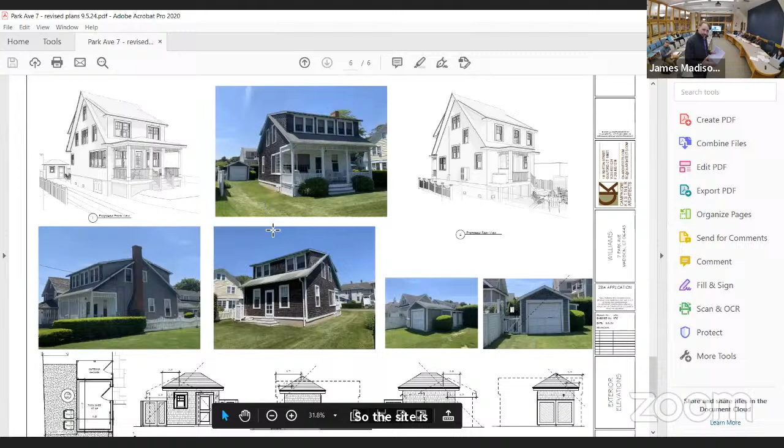So the site is very small, about 4,400 square feet, and it's tucked in with similar homes on the north and south side. It has a FEMA line that comes through the middle of the site diagonally and touches the front corner of the building, putting it into a LIMWA zone.

A limited wave action zone basically has VE zone requirements on the home. So in order to do anything to this, the 50% rule associated with investing in it would really trigger a full upgrade, meaning it needs to go up on piers and have breakaway walls and such.

The existing cottage, although they had done a pretty significant renovation on the second floor, they had not really done any improvements to the structure of the first floor foundations when they did it. So they're really evaluating what would need to happen to bring this into conformity in its location.

It really wasn't a feasible option, so we did take the route of taking it down and rebuilding it. In doing so, we can bring it into full structural compliance, full FEMA compliance. We're planning to move it back on the lot so it's in the still water flooding zone and not in the wave action zone, so we don't have to go as high and actually take it out of harm's way. The elevation I'm showing, proposed versus existing, is very similar.

They love the home, they love the views, they love the positioning. So we took a lot of clues from that, but it is a little taller given how we have to raise it up compared to what it was before.

So if we can go back up to the site plan, I'll walk this through and then we'll come back to the accessory structure. So the first variance is associated with the front setback. This dotted line here is showing the existing footprint of the front porch, and we're planning to move the house back 5.25 feet compared to what's there now.

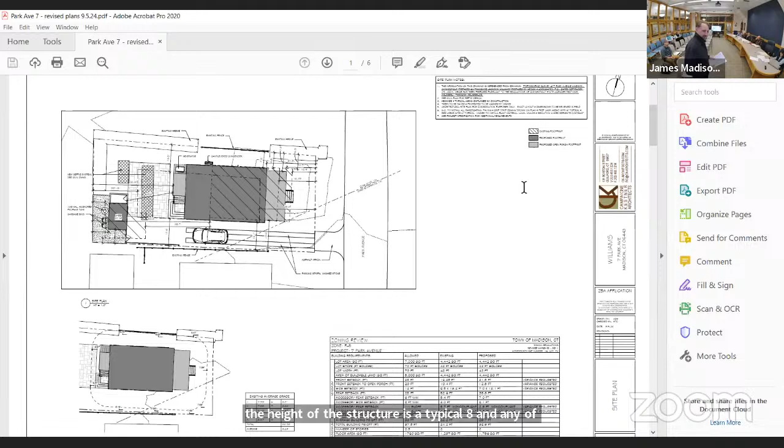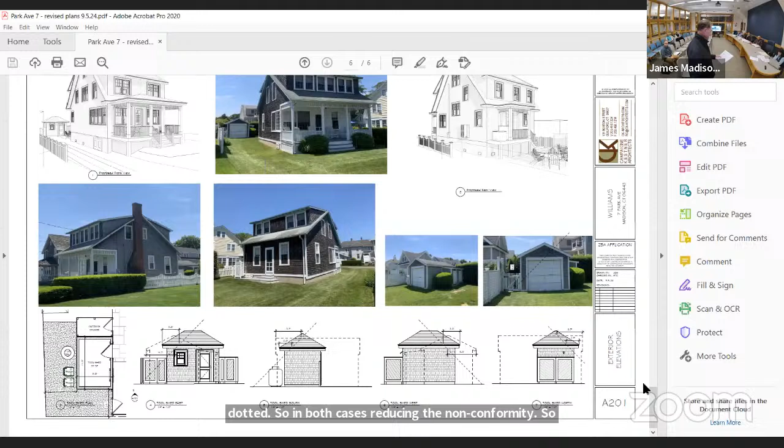If we go to the last page of my presentation, you can see the diagonal lines coming off of the two sides, and you can see the existing structure dotted in. In both cases, we're reducing the nonconformity. On the rear side, we're reducing it by 2.8 feet compared to the existing garage, and on the south property line, we're reducing it by 2.7 feet. In both cases we're making the footprint smaller, the shed smaller, and reducing its nonconformity by pulling it back from the side property line, while maintaining a similar height, which keeps it a viable shed. If you go much lower with the eave, it's not really going to give you much storage.

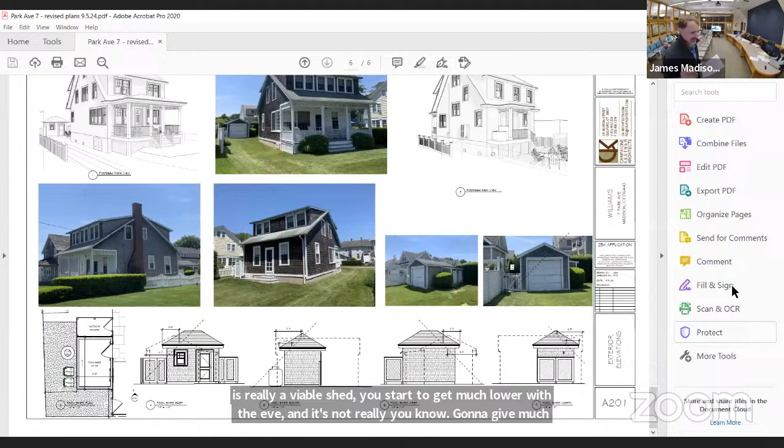So we go back up to the second page. Just for orientation purposes - second page, third page - this is the existing site plan.

The layout of the home is very simple. There's a front porch that's open on the front, not planned to be screened. You come in to an open plan living room, kitchen, bath, and mudroom entry with a stair going up. Very minimalist in its layout. There's really not much place that we can squeeze. A very small back porch comes down to a patio that sits over the septic system and the shed in the back. We're hiding the trash cans and a propane tank in the back.

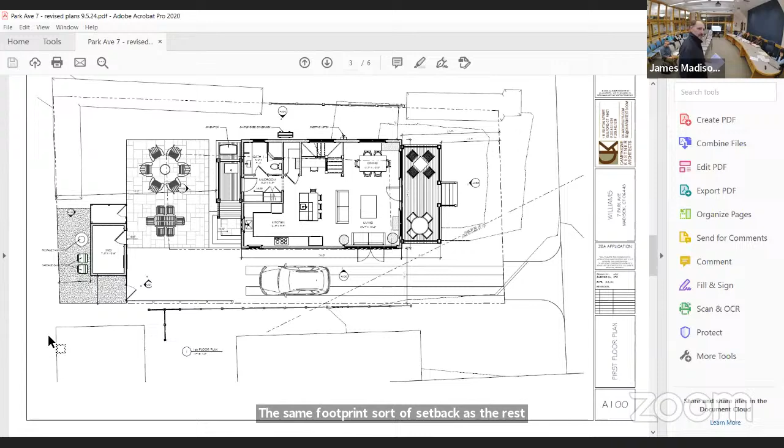Utilities will be hung off the side, and the generator is in the same footprint, sort of setback as the rest - that's under the same setback variance for the north side. Then on the upper stories, you come up to 2 bedrooms and a private bath, with a stair in the middle and a den. Then you come up to the third floor, and there's a sort of livable attic space that's open, with an overlook down the staircase. Very low headroom condition up here, but it does add a little bit of usable space.

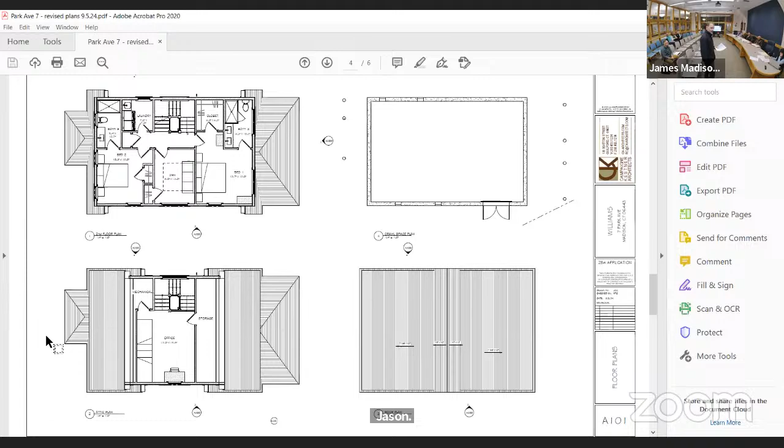We're compliant with regard to height and average roof with what we're proposing, and I think it's in keeping with the adjacent neighborhood. I think it'll fit in well, still cottage in its feel, still has a lot of the characteristics of the original cottage. Happy to answer any questions you may have regarding our approach to this.

Do you guys want to review the site plan, or do you want to ask questions and then move on to the site plan after? Coastal site plan, for you guys. I thought that was the site. Well, the coastal site plan is separate, that's going to be my presenting. I was going to ask for the actual zoning board application form - could you put that up? Sure, sure. I think you've covered most of the stuff that's in it. Yep, no problem.

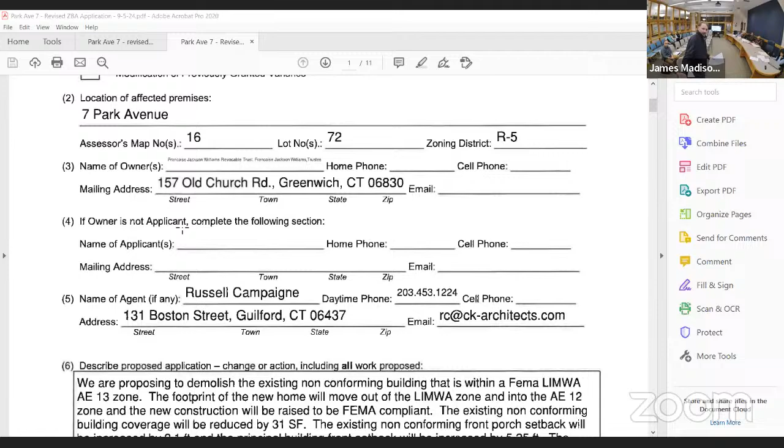So this is the zoning information as far as the lot and location, the ownership. Reading through this, we're planning to demolish the existing nonconforming structure that sits in a LIMWA AE 13 zone and move it back on the property so we consider it a still water flooding zone to be FEMA compliant. We're reducing the nonconforming building coverage by 31 square feet.

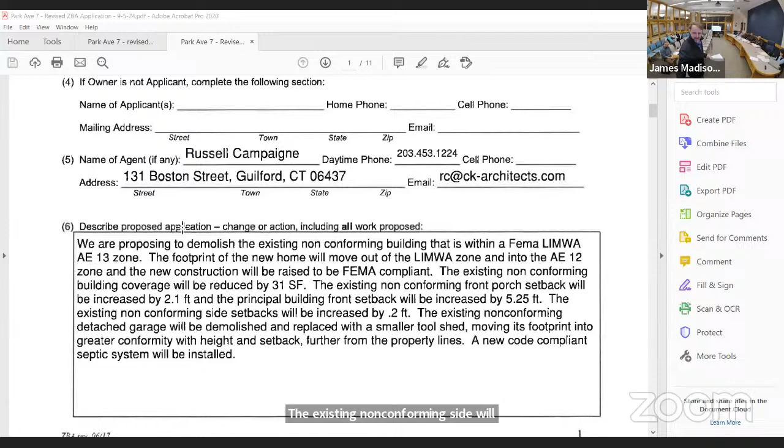We're reducing the existing nonconforming front porch setback - we're increasing the setback by 2.1 feet. The principal building front setback will be increased by 5.25 feet. The existing nonconforming side setback will be increased by 0.2, and the existing nonconforming detached garage will be demolished and replaced with a smaller tool shed, moving its footprint into greater conformity with the height and setback.

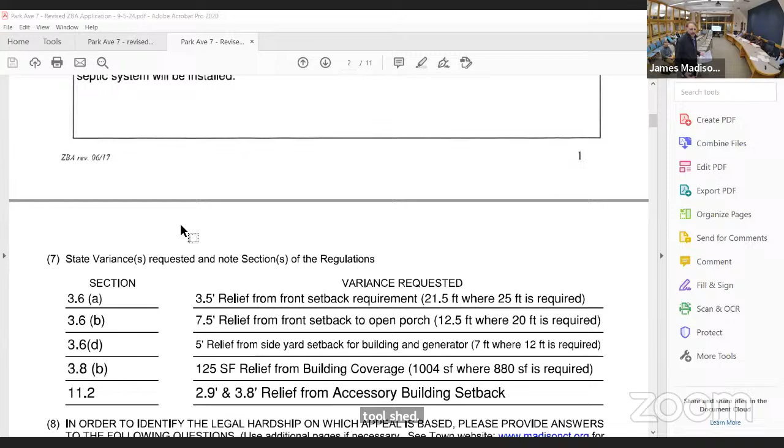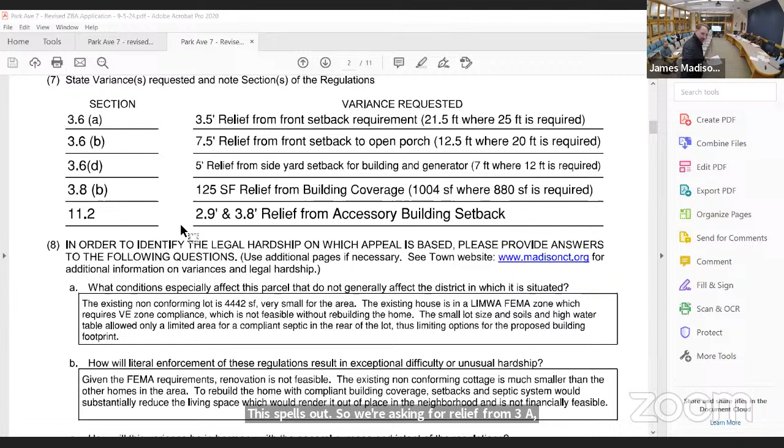This spells out that we're asking for relief from 3.6A, B, D, 3.8B, and 11.2, which lays out the various setbacks, the coverage, and then the relief from the accessory building setback.

I think the site is existing non-conforming, so there's a hardship associated with it being an existing non-conformity. The shed, garage, and house were all built prior to zoning. It's a very small lot at 4,442 square feet, and it's in a FEMA zone and a LIMWA zone, which is forcing a major redo of the property to bring it into compliance. We also have septic being brought into conformity. It's near the shore, which is definitely a benefit per the plan of conservation development and town plan.

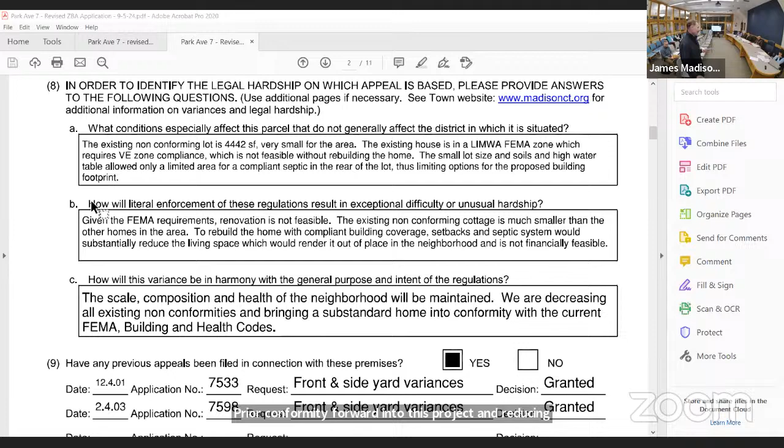Literal enforcement of the regulations would really render the site unusable as a home. With the lot coverage and floor area ratio requirements, it'd be really unusable. So bringing that prior nonconformity forward into this project, and reducing it slightly, is the only feasible avenue to have continued use of this property.

And how is our proposal in harmony with the general purpose of the regulations? I think we've taken care to look at the existing home, how it fits in context with the adjacent homes, and design something that will feel appropriate and in keeping with the neighborhood, yet still viable, safe, and better for the environment with the septic.

We did have two variances that were granted previously that, if they were written correctly, probably would have meant we wouldn't need to be before you. But when they were granted, they mixed up the north and south property lines in how it was written. They granted 7-foot relief from the north, but it should have been on the south, or vice versa. So we decided when we met that it wasn't something we really wanted to argue or bring forward.

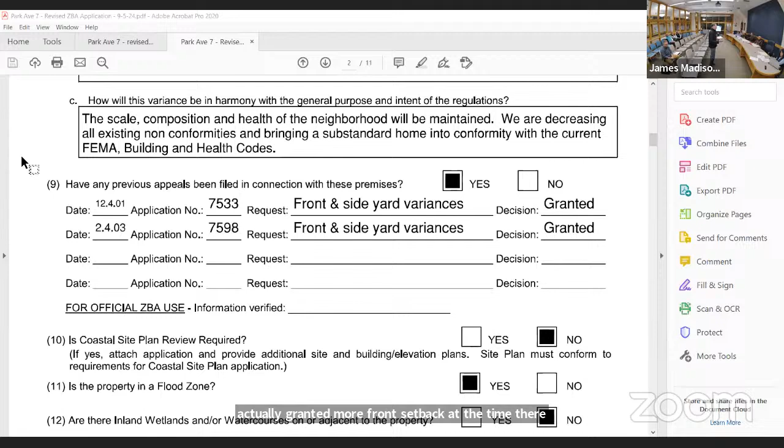So we decided to just start over and get new variances for the property. This had been granted when they did the dormer change on the second floor, and they were actually granted more front setback at the time. There wasn't an open porch setback, so that wasn't granted, but the north and south property line setbacks were granted at that time, both sort of in keeping. They just reversed them when it was written and put on the deed.

So in the process of this, you're saying, okay, we'd like to cancel those and replace them. Yes. I don't know if they're ever actually canceled, they're always there. But first, they were under the old zoning, so the requirements were very different. Basically it was 1 acre zoning when they were granted back then.

The way it was handled is very confusing, because there were two that were supposedly the same, a corrected one or something, but it wasn't actually corrected. It was very strange. They went before the board, got it issued, put it on the deed, but it was granting relief from the south property line when they needed it on the north. Then they came back and did it again for the same variances two years later, and it was reversed again. I don't know what the full history is, it's a long time back, in '03, so we don't really have a record of that.

So I think we should just move forward with our presentation and hopefully seek a new, well-written variance that addresses all the issues. I was just thinking of clarifying it, if we just said, forget those. Yes, I think that would be our interest.

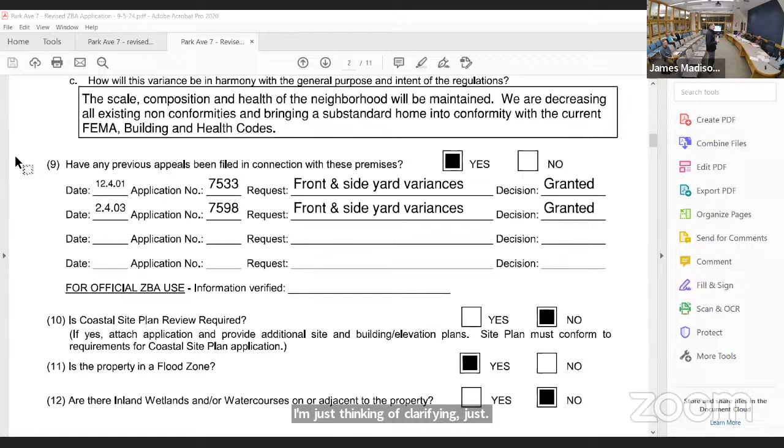So it is in a flood zone. We do have a coastal site plan. I don't know what happened here, but that should be yes. Yes. And there are no wetlands within 100 feet of the property. This is an issue with your application. So we're not within 500 feet, and we're not in the watershed boundary.

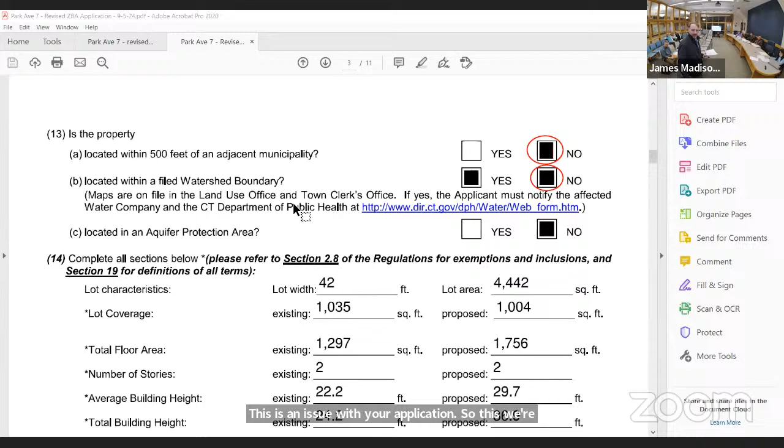And these are the lot characteristics you can see. So what are the red circles? These are the ones that should be marked. This one, for some reason, both pop up black when they try to fill the application online. Yeah, the fillable form makes an error, so they're indicating with the red circles what the actual answer is.

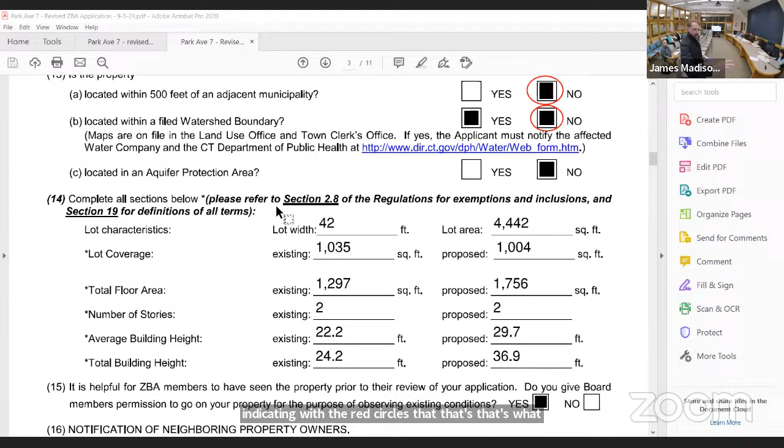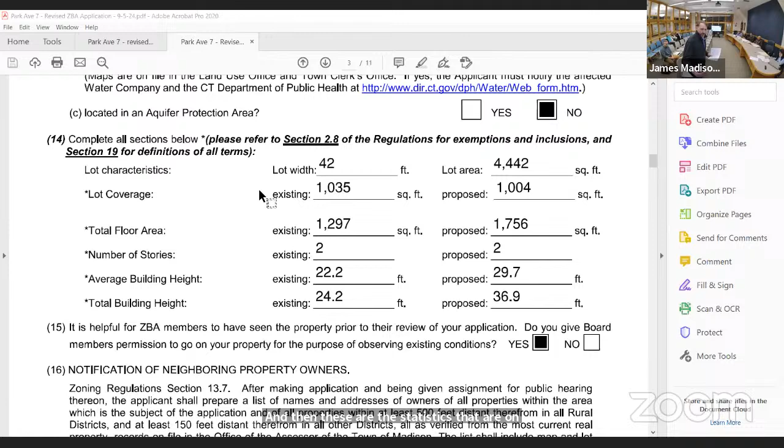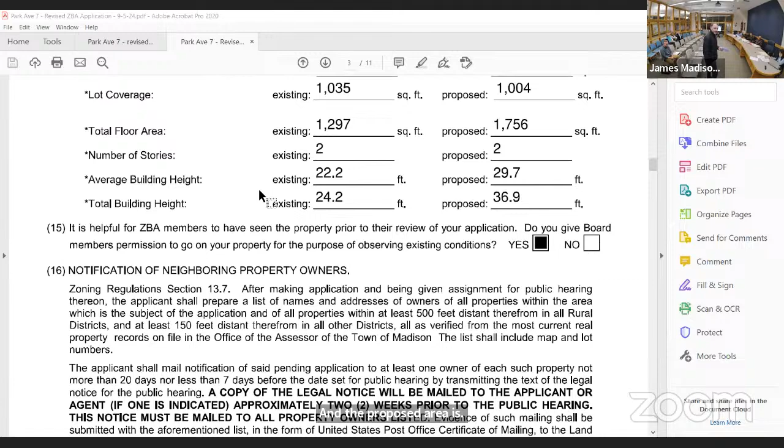Okay, and we're not in an aquifer protection area. These are the statistics on our chart as well. We're compliant with regard to building height and average building height, and the proposed area is bringing forward the existing nonconformity for the total floor area. That's it, the rest of this is just all boilerplate.

Would you mind going back to the page with the LiMWA zone line? That's on the site plan, the first page. So you were saying this house was built prior to zoning, so since the house was put there, then this line was put on the property. So, yes.

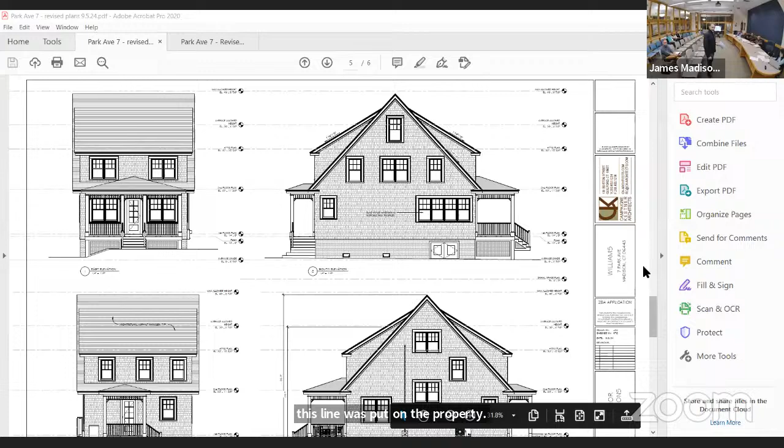This is the FEMA line that distinguishes the A13 LiMWA zone with wave action, and north of that diagonal line is an A12. This corner of the porch is over that line and brings the whole building into the requirements of the LiMWA. I see, so if you were to just rebuild it in place, you'd be in there.

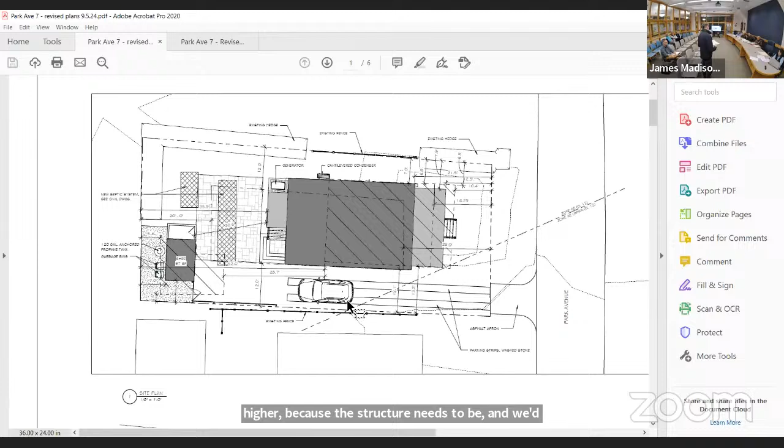We'd have to be 3 to 4 feet higher because the lowest structure needs to be, and we'd have to be on a pier foundation system as opposed to a regular foundation system, which is much more costly.

So we are just sliding the house back in the same line, just enough to get us out of that. So that 2.1 feet that we're pushing back is basically enough to put us into the A, and that allows the house to be 3 feet lower.

Thank you. How much of it? About 3 feet, because it's the structural depth and an extra foot, A13 to A12, plus the 2 feet of structural depth, so it's upwards of 3 feet. That makes sense.

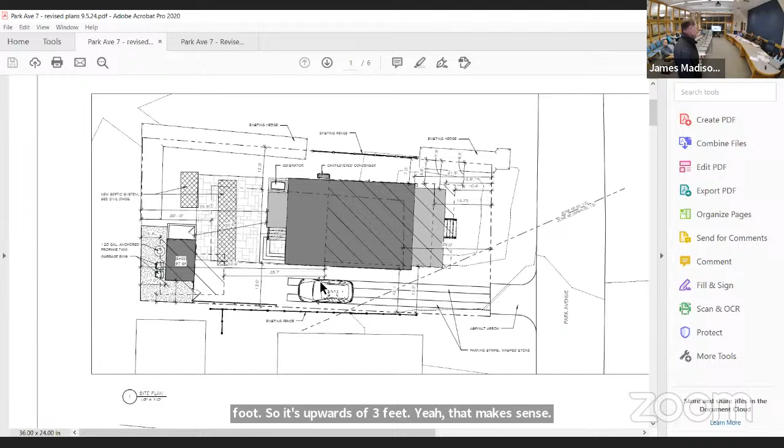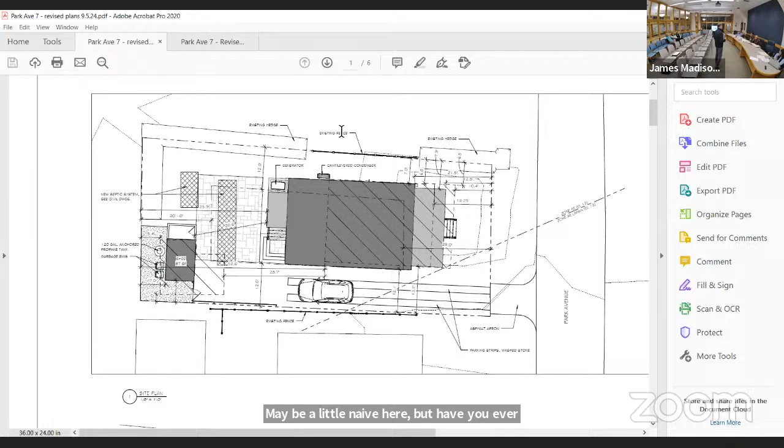Maybe a little naive here, but did you ever consider just raising the house as it is up? Then you would avoid all of these variances because you could rebuild in the same footprint and carry your variances forward.

We would still be in the LiMWA zone if we did that, so we would have to raise it that extra 3 feet. We would have to add the stairs.

Does Madison have a by-right FEMA compliance? No. So many other towns do have the ability to raise a house, but I would have to come for a variance for you to raise the house to be FEMA compliant. Guilford has a staff approval system for FEMA if it stays under the height, but Madison does not, so I still would be before you to raise the house to make it FEMA compliant.

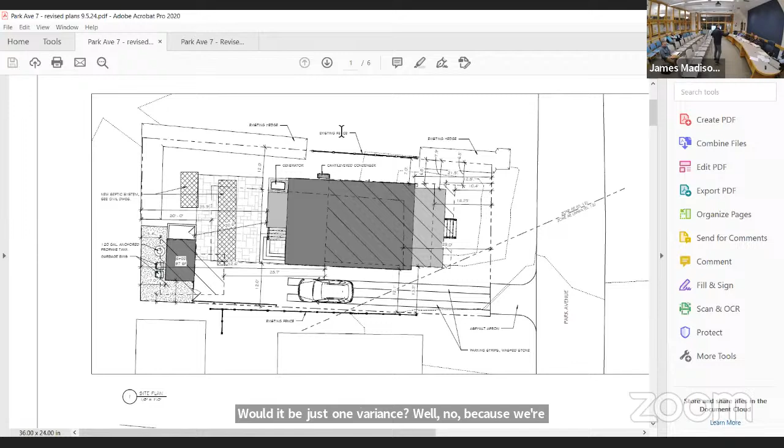Would it be just one variance? Well, no, because we're non-conforming and we're making the building higher within those non-conformities. So it really would be very similar, because I'd be increasing the non-conformity within a non-conforming setback. Yeah, because if there's a setback requirement and you raise the building, then you need to get a variance for this again. Isn't that correct, Maria?

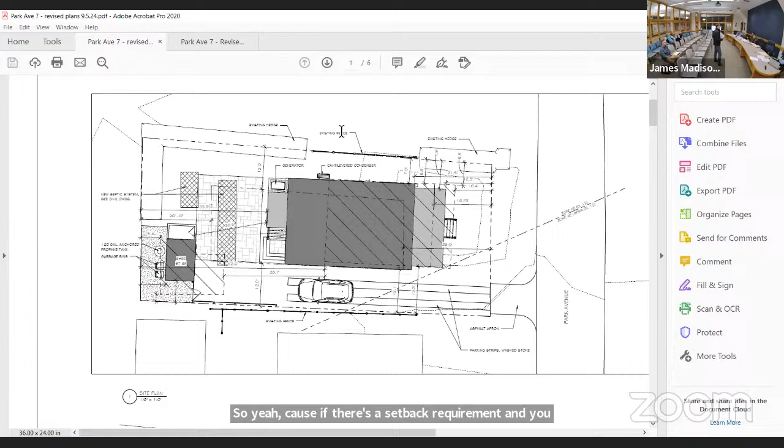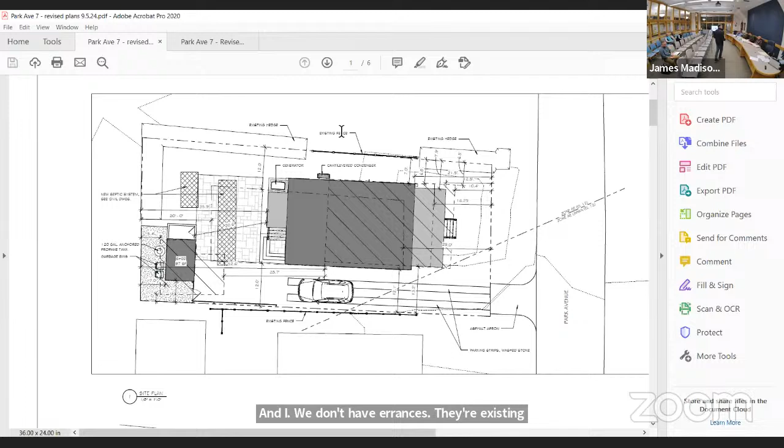So it would be these variances plus raising it. But even if he stayed in the same footprint, all of those other variances could stay with the house, they're technically increasing because they're increasing vertically, and we don't have variances, they're existing non-conformities. Arguably, there were variances granted, but they weren't written correctly.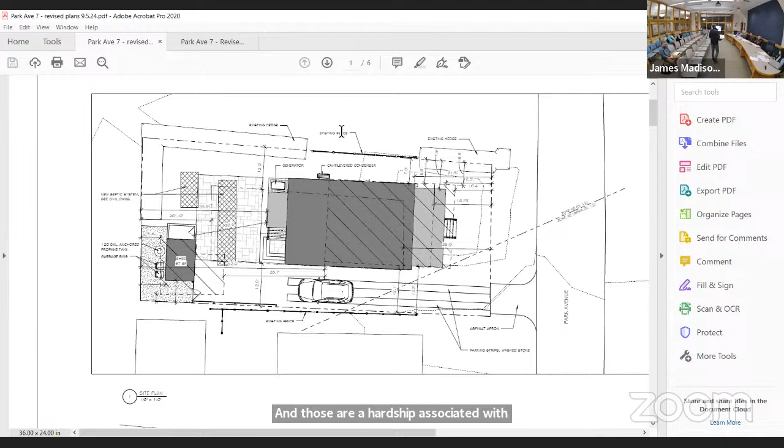So we really are just basing this on the home was built prior to zoning. Zoning then was imposed upon it to make nonconformities, and those are a hardship associated with that continued use of a property. So this, I think, is the path of least resistance for them, and definitely better from bringing it more out of harm's way by moving it back on the property.

And really lifting homes, if you raise the home, you're exposing it to more wind, you have to bring the structural upgrade to the whole house. For a cottage that was built like this that just has sort of 4x4s every 4 feet, it's a really hard process to try and strengthen that home and bring it up. We have to meet energy code if we do that, so we have to bring an old cottage up to energy code.

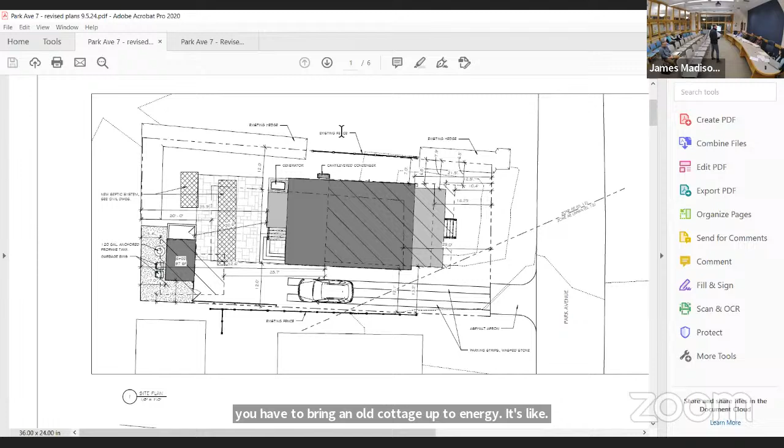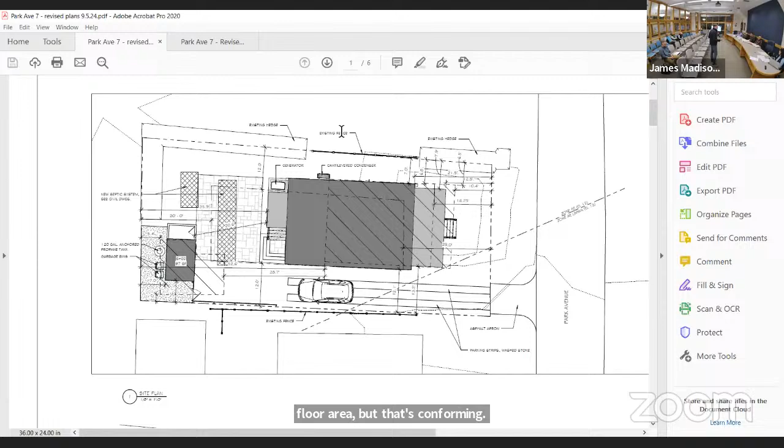It's a cascade, and it's why you see so many homes, unfortunately, not being renovated. You see a couple that do, but then you watch what happens to the house after it's lifted - it's basically a whole new house, they're just done from the inside. So this, I think, grants - we are going a little higher to capture a little bit more floor area, but that's conforming, just to justify the investment and make it a little bit more usable, but it's only 1,756 square feet of living space. It's very, very small.

Yeah, my only concern was the number. I mean, you have 1, 2, 3, 4, 5, 6 variances here. And our charter here is to say, all right, if you've got 6 variances here, what have you given up to justify those variances? Well, we've made every single one more conforming. Yeah, but is it enough? The bottom line is still you've got 6 variances. If you only had 1 or 2, but here you've got 6. And you've actually increased on a couple of them, made it more non-compliant.

No, everyone is a reduction in non-conforming. No, if you go to the accessory building, the existing is 5.7 and your proposed is 2.9. So that's an increase. And the accessory side setback, the existing is 6.5. No, it's backwards the way it's written, so the existing rear extends 5.7 feet past the 1-to-1 slope. Our proposed is 2.9, so that's a 2.8 foot reduction in the non-conformity. So it's not, because the setback is set by the height of that angle, it's backwards. We don't have a setback, it's not like we have to meet a 10-foot setback. It's determined by the height.

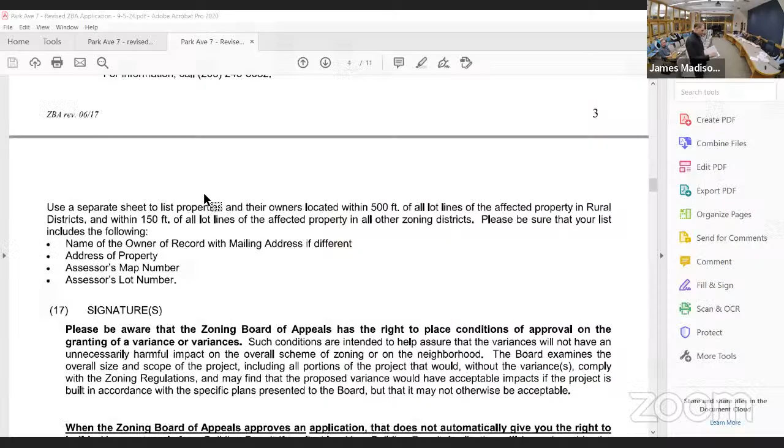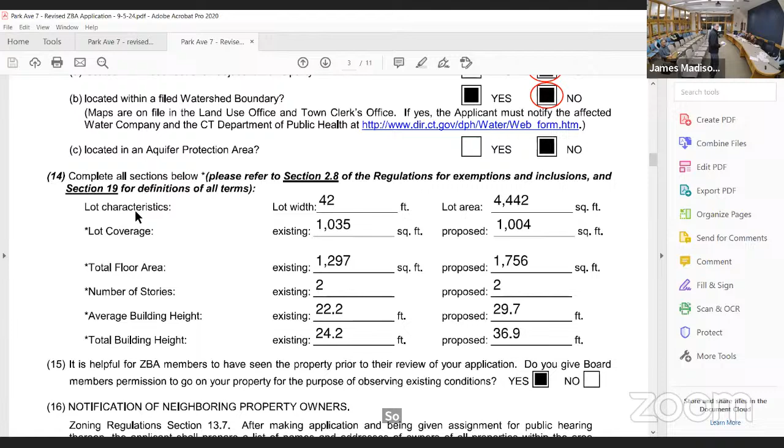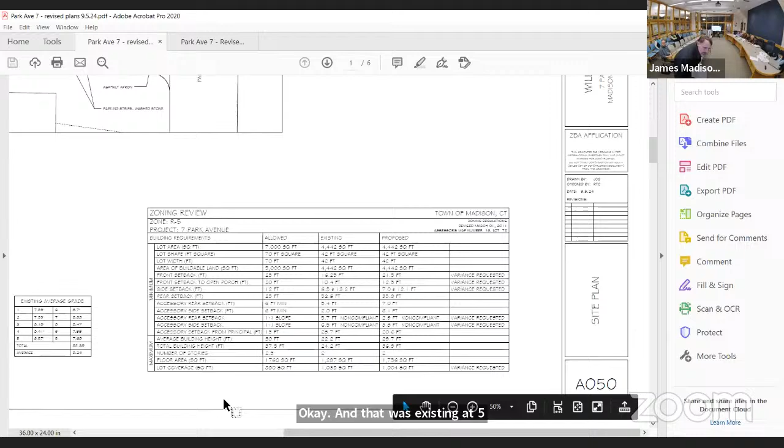Here, yes. Okay, so you were pointing to this, 29.7 versus 22. That is the height, and that's got to be below 30. So we're still conforming. Okay, so what else were you... are you on the zoning table? No, I wasn't concerned about that, I was looking at your table for the accessory rear setback. Okay, and that was existing at 5.7. And now you're at 2.9, so closer.

Can I point out something? I see where you're going. I find that sometimes the setback differences are a little confusing, because on the tables here, they state how much the non-compliance is, but on the other one, it states how far the setback is. Right, yeah, and it gets inverted, because in this one you want it to decrease, but in the other one you want it to increase. Right, the setback from the front, you want to increase the setback to be further away. But on this one, it's written as how much of a non-compliance do we have? We're reducing non-compliance.

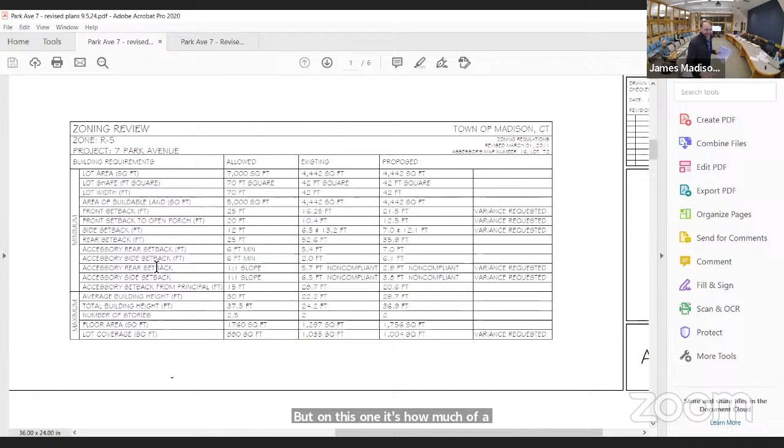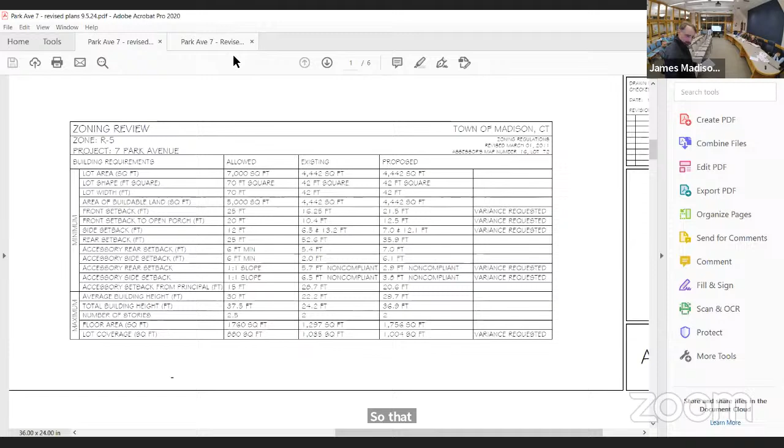So if you just look at our chart, the current setback is 5.4, our proposed is 7 feet, so... no, actually, that doesn't add up right either. So it's reversed. We're non-conforming by 5.7, and we're going to be non-conforming by 2.9 when we're done, when we move the building further away. Right, so we're ending up being 2.8 feet closer to conformity.

But it's not the same, because the eave height is slightly different, and that's what's setting our measurements. So it's that particular diagonal line that's very confusing, but in all cases, we're reducing the non-conformity. Okay, all right, I'll believe you.

I would say that really why so many variances are required on this particular lot is that it's 4,400 square feet. I mean, it is the size of a lot of houses, it's the size of the property. And that's been a continued use, and it's similar to some other, but it is smaller than most of the other area project properties. But I do think that that is a particular hardship to maintain a useful site that you can build on. And so there aren't too many other ways that I think we could bring it further into conformity.

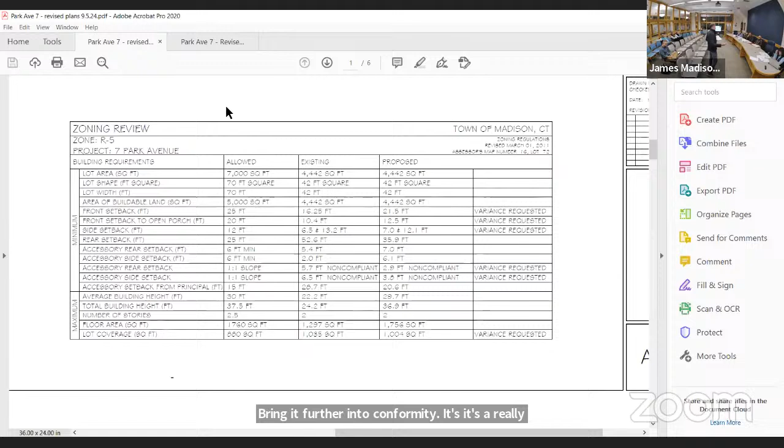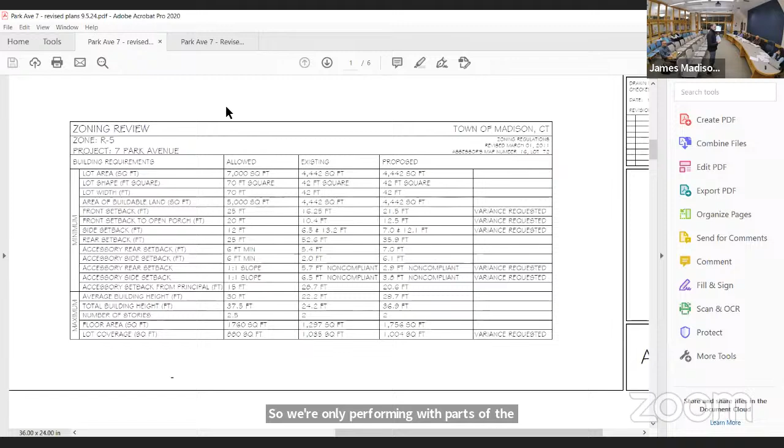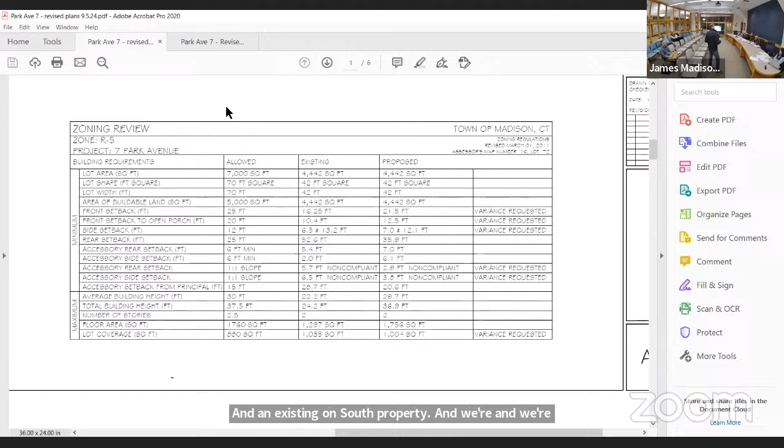It's really tricky, but the big things, the bulk of the house, we're conforming with regard to height and with floor area. So we're fully conforming with regard to the bulk of the house, which I think is important to say. And we're maintaining an existing condition on the north property and the south property, and we're benefiting the town and the neighborhood by moving it further back. And we're bringing in conformity with septic, which Mike will get into, which I think is a real benefit to the town as far as granting this and allowing the investment to improve this property will be a benefit.

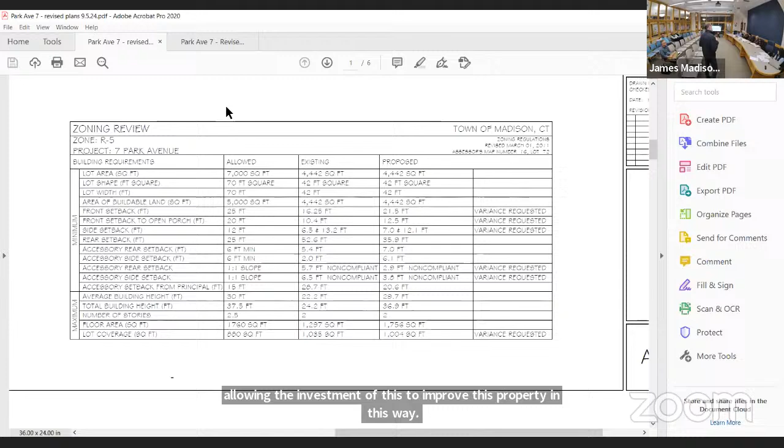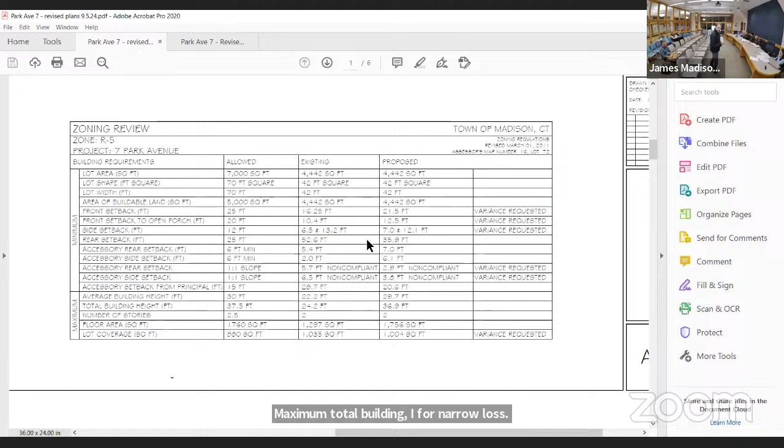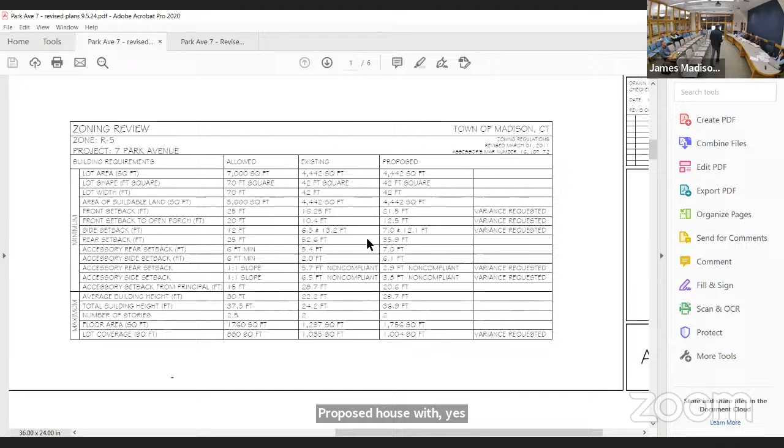I did have a question on the maximum total building height. In the regulations, there's a maximum total building height for narrow lots. This property width is 42 feet, if I'm correct, and the proposed house width is 24 feet. Is that correct for the new house? Yes, 24 feet. Okay, so that comes out to about 57%. And in this particular table, it says the maximum total building height would be 36 feet. What table is that? Is that the zoning laws? 2.7.1, zoning laws, it's in the regulations.

So that might be, so the narrow lot, you're saying percentage wise of the setback or the house width compared to the width of the lot. Yes, and it's triggered for narrow lots that are under the existing required lot width in the zone.

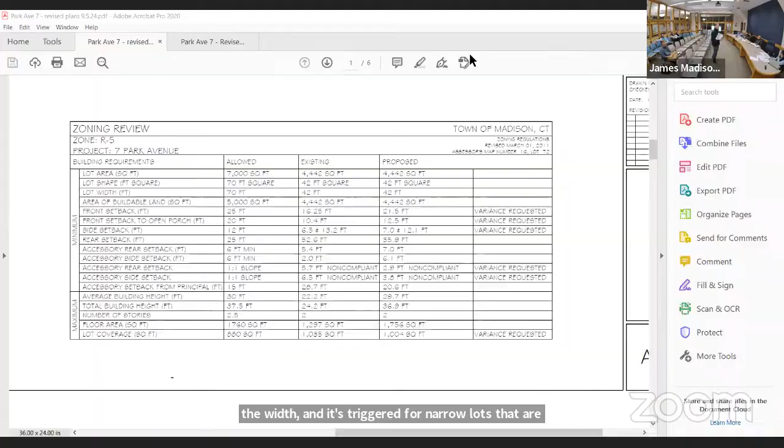I thought it had to be raised for FEMA. I don't know, well we are higher than what... yeah, I think there is an exemption for FEMA, but we are potentially higher than that. I think if we find that's applicable, we could modify our design in order to be compliant with that height. Might have been an oversight.

You pull up that section? Yeah, I guess so. Which, is that an exhibit submitted? Yeah, so that's the active current copy of the zoning? Mine's old. Height limitation 2.7.1. Maria's going to bring it up. That's good, John. Maria, can you display that? I'm getting there. Okay, super, thank you.

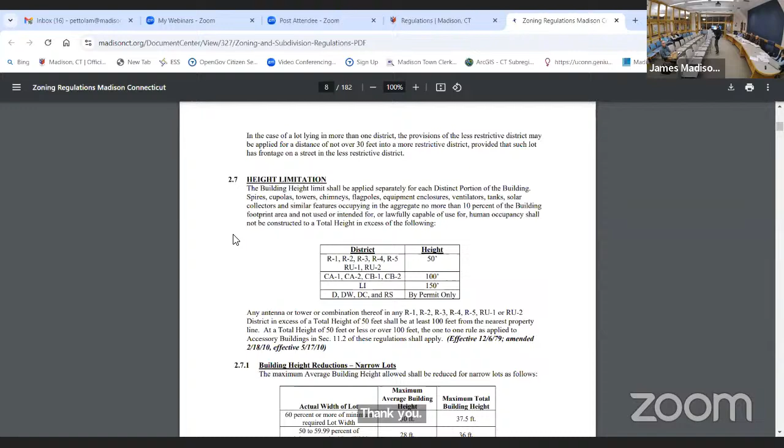So 42, the house, widest portion, so that... it could be, so we're in the, here it is. Yeah, it's over here. So 36 feet and average 28 feet. Okay.

What is, and there's no exemptions, there's not even a FEMA exemption. So I thought there was. For buildings in the floodplain, maximum average total building and average height, just from the original grade, it doesn't give an exemption. I was taking it as that they were exempt, but it doesn't give an exemption. Okay, shall be measured on that, well we likely have to look at that, actually.

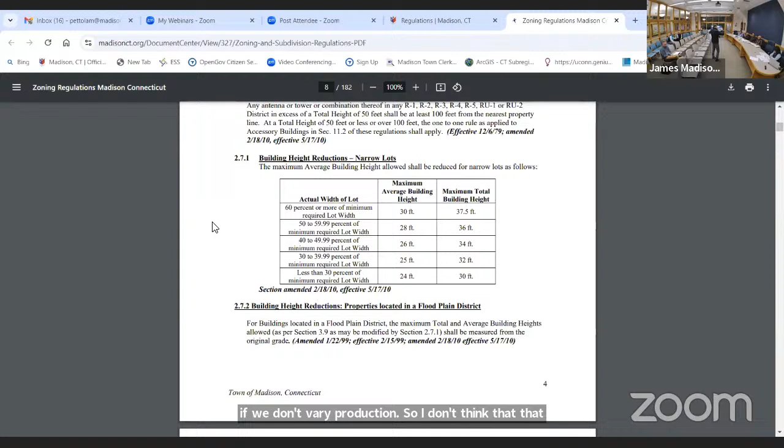So I don't know whether, I mean if that is required for us, I'd love to move forward with our variances that we have before you this evening. When it goes to building permit, we won't be able to build it if we don't have a variance for a height reduction, so I don't think that imposes any real concerns. It's basically just lowering the pitch of the roof. If we were to look at the way this is laid out, we would use the pitch of the dormers and the main roof in order to bring them to 36 feet, into conformity. So when we go to get a building permit, we would have a compliant situation.

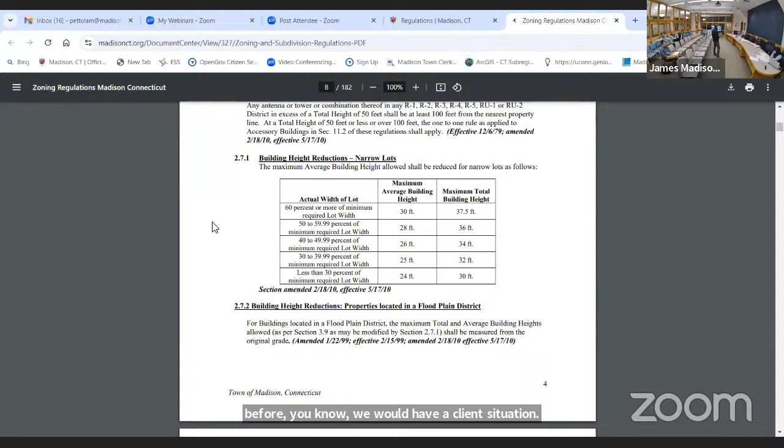Maria, does the fact that they'd be elevating it because of FEMA requirements provide justification for another variance? I would think that basically says that 36 feet doesn't allow it, that's why. I actually missed it too when we went over it, but like you said, the other variances we're asking for would come through for building. So I could reapply for another variance if it came before you, if we wanted to pursue that. But I think it can be a standalone situation because I can talk to the client about making a modification of the overall height of the project. We designed this way because we thought we could go to 37.5 feet.

Yeah, I'd hate to have to deal with it separately though, because then we could say, well no, you can't do it, because you violate something, you don't have a variance up to that height. And I don't want to, you understand what I'm saying?

I'll have to consult with them, but one of the challenges of arguing a variance on this piece is that I thought there was an exemption associated with FEMA to encourage people to bring things into conformity. There isn't, but if you took the existing house and raised it to be compliant with FEMA, the peak would be lower than we're proposing. So it's harder to push for a variance to make it higher. In this case, we'd be increasing non-conformity beyond the FEMA requirement. I don't know how we'd word an approval for the plan if we then had to say you can't make it that high.

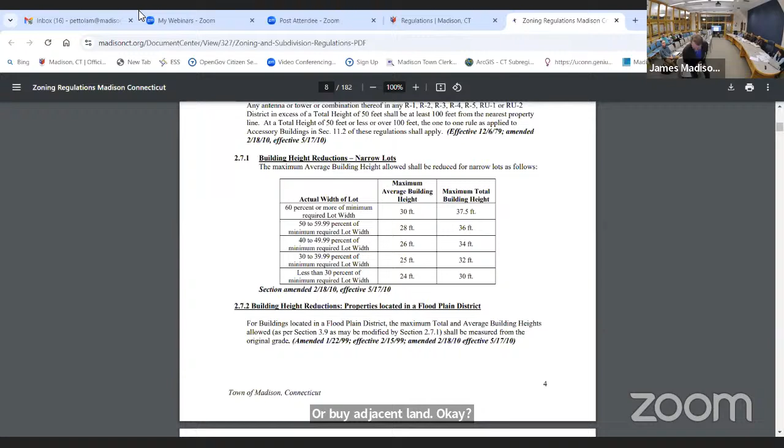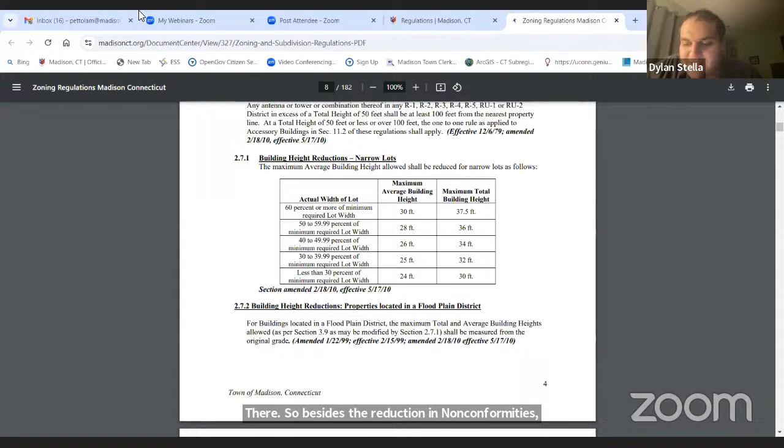I'm sorry to interrupt. Go ahead, Dylan. So besides the reduction in nonconformities, would you say the size of the lot constitutes a hardship? I would say the size of the lot is a hardship, the FEMA requirement is a hardship, the septic constraints of getting a code-compliant septic on the property is a hardship, and that it is an existing nonconformity that we are reducing in all cases. Okay, thank you.

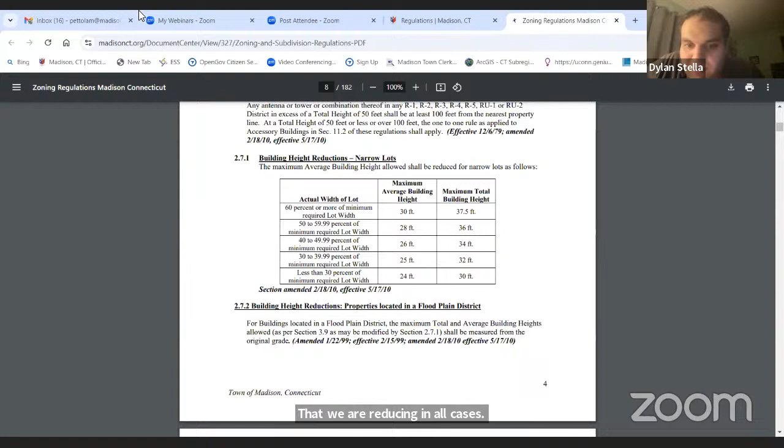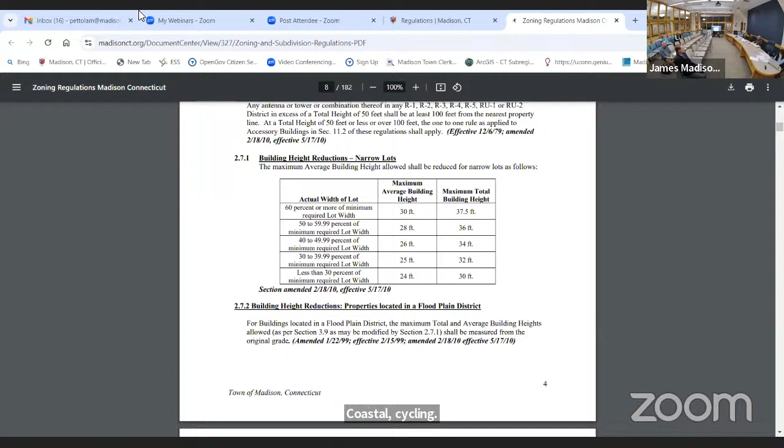Should we move on to the coastal site plan? I think it's okay. Would you mind reviewing the coastal site plan? Mike is here. Okay, great. Good evening, Mr. Chairman, members of the commission. For the record, my name is Michael Harkin. I'm a professional engineer and principal of Harkin Engineering, located at 78 Wolf Hollow Lane in the town of Killingworth, Connecticut. Again, here tonight on behalf of our client for the project at 7 Park Ave in your town of Madison, Connecticut.

So what you see here is our coastal area management site plan, or coastal site plan. If we start off with our location map, we all know where Park Ave is based on the map. You can see we have the survey, performed by Gesick and Associates. The site is located in an R5 zone, also known as map 16, lot 72. As Russ said, it's a little over 4,000 square feet, or 0.1 acres, so it's very, very small.

I had the easier job as compared to Russ's. Maria, if you can zoom in on the site plan.

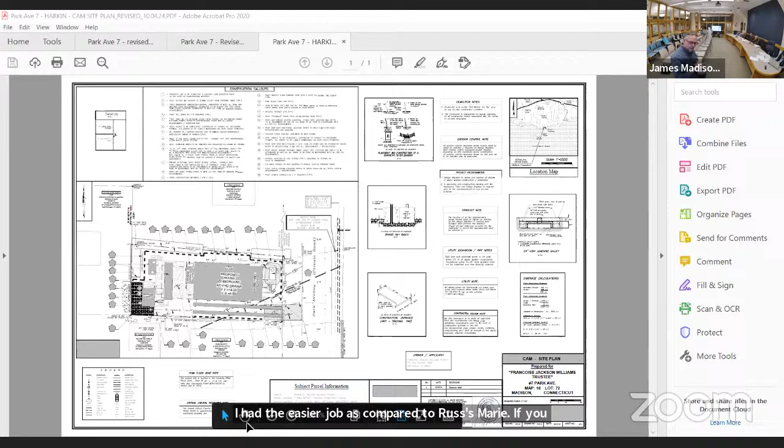As described by Russ, we're in an AE12 and AE13 zone. We have the big bold line here, which is the flood zone, and then the LiMWA down in this section. As per Russ's discussion, we've moved the house back. The proposed house is shaded pretty dark, the 2 bedrooms, and you can see it's right at the corner, right outside of that zone.

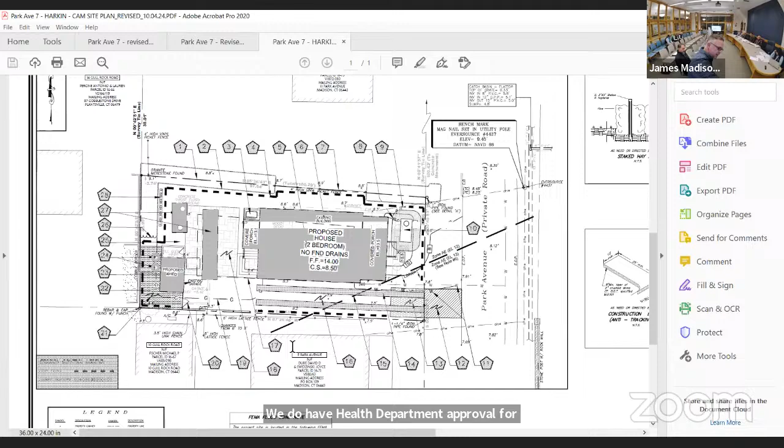It's actually a difficult site in that we have that zone line and we are constrained by it, but we're also constrained by all the setbacks of the septic system to get a code conforming septic system. We do have health department approval for a code conforming septic system. You can see the tank in the rear yard and the proposed system again in the rear yard, sandwiched between the proposed shed and the existing house. So we have constraints here and here, virtually squishing the house to what you see in front of you and what Russ had shown on his architectural site plan.

In order to maintain the town of Madison's requirements for storm drainage, there is a little bit of impervious increase on the site. So we do have an underground detention basin out in front. So we checked the box with that.

The overhead utilities for the house currently come in from the Eversource pole across the street. It will continue to do so, just attached in this corner, and we will have no aerial trespasses on any of the neighbors' properties. The water line main is on the far side of the street, but we do have a gate valve on the property. We're going to connect into that gate valve and then come across into the proposed house.

In the front section, we will have an asphalt area in the right of way, and then it will go to 2 stone strips for car parking. Right now they're really just driving on the grass. If it rains, and if they're going to be living here full time, it's going to get muddy. But they wanted to continue with that old country feel with having those stone pads there. They also work as ground infiltration and detention, so that actually worked out in our favor as well.

In the back, you have the covered porch area with the emergency generator, and then the call outs for the first floor elevation, which will meet FEMA. We do have a letter from DEP. They had 3 minor comments that we'll go over, one of which was to ensure that their appurtenances like the AC condensers, generator, and electric were raised to meet the FEMA requirements, which they are.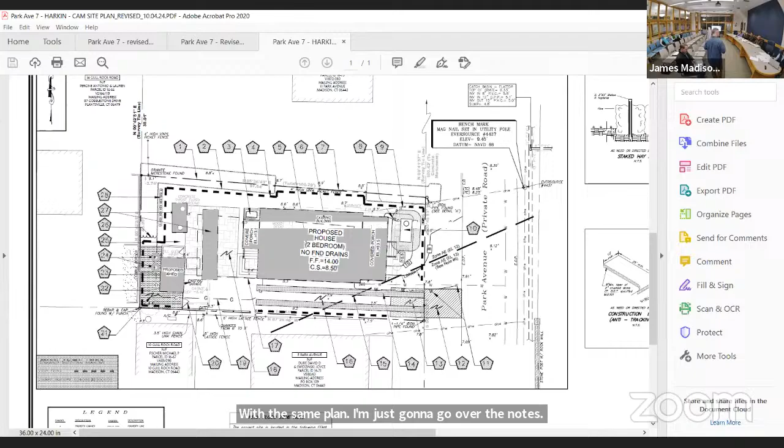I'm just going to go over the notes. You may remember, a month or 2 months ago, when we got the comments back a couple hours before the meeting. We got that again tonight, so it's all good.

Coming down the list under summary and recommendations, if Maria wants to pop that up: number 1 was to ensure the installation and maintenance of appropriate erosion and sediment control measures during the planned period. We have them, as we had just gone over. We will do so. There's a note that if there's an instance where more are needed, we have the right to tell the contractor to put more on there.

The second is to ensure that the structure's elevation, electrical and AC units meet FEMA AE12 zone and local flood management standards. That's the blurb I just put in at the end of my presentation, that we've done that and we've checked that, and we will check it again when the project is completed.

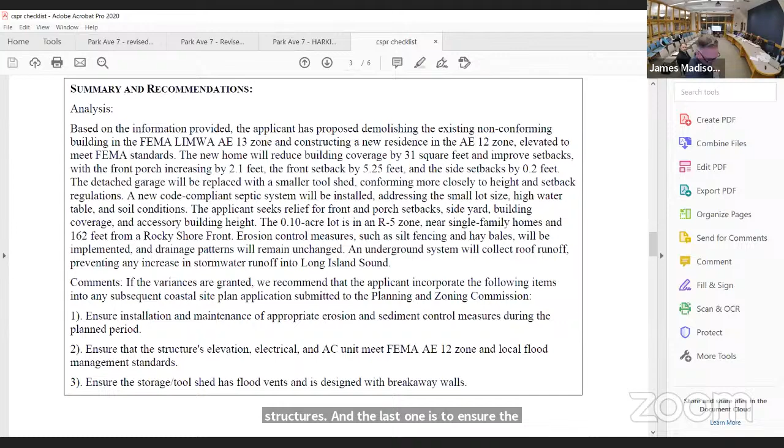We're required to put an as-built drawing together, and that will give the elevations of those structures. And the last one is to ensure the storage tool shed has flood vents and is designed with breakaway walls.

This one's a little wonky. We could put the flood vents in there. I don't think we have a problem with that, but how do you really design breakaway walls on a shed? You really can't put lattice work together like that. My belief, and I can't say for sure, is that the reviewer believed the whole project was in the V zone, and if it was, everything would have to be to that effect. But we don't mind putting the flood vents in; we just don't think we can construct a structure with breakaway walls. It would just collapse.

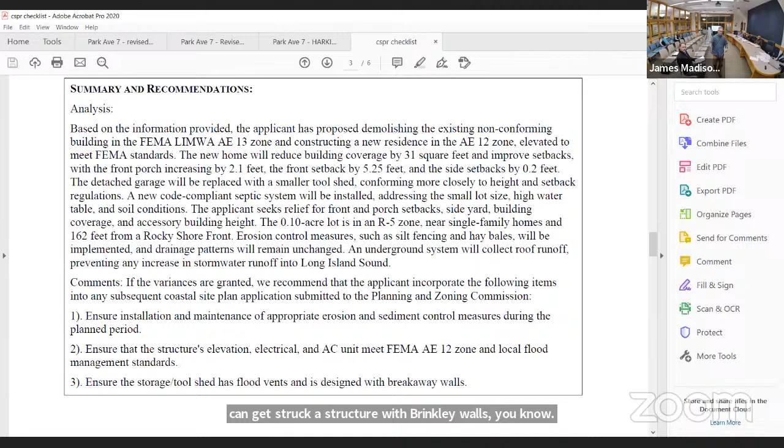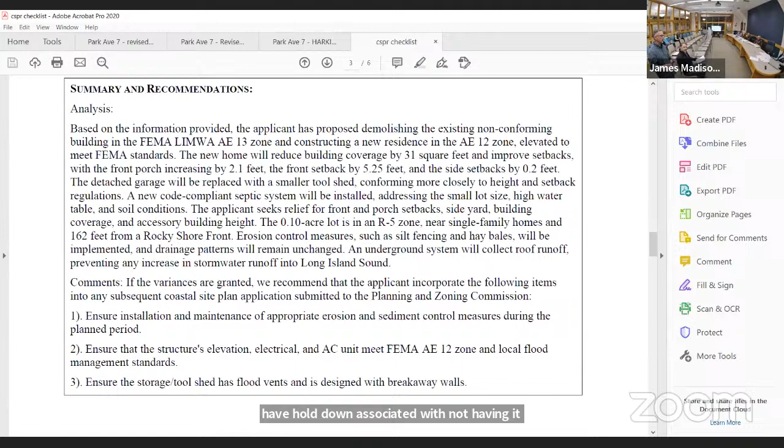So out of all three of those, we don't have a problem with it. We'd just like number 3 modified to no breakaway walls. There will be duckbill anchors to avoid flotation—that's a requirement of the code. So they have hold-downs to keep it from floating, but breakaway walls aren't what FEMA requires or the building code. Yeah, there's a lot of little appurtenances we don't talk about, like the propane tanks being strapped down with chains and anchors. Those are things that have to be done per FEMA in a flood zone.

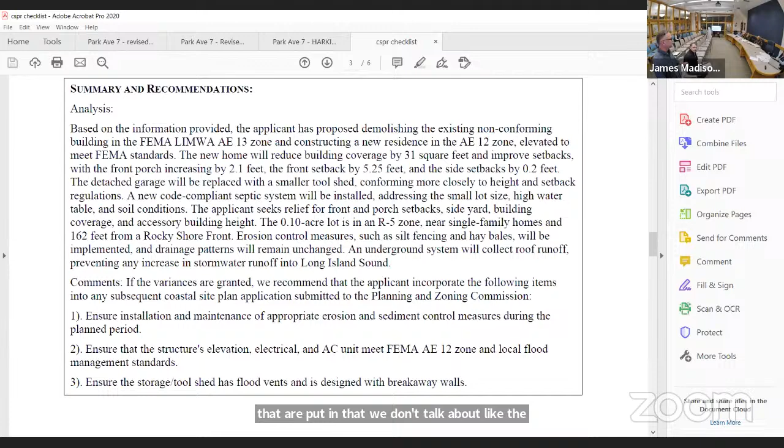Thank you. Does anybody have any questions about the site plan? Dylan? Okay, thank you for your time, guys. Thank you.

Anybody in the audience would like to speak in favor of the application? You know what I'd like to do first?

There was a letter that came in, legally unsigned, but it talked about the water rights, the water company rights. And I think—yeah, we received an anonymous letter today. It was anonymous, okay. But the easements are all—yeah, I think it went out into the road and has nothing.

Yeah, we have an A2 survey that represents the easements, and they're incorporated into our setbacks. We don't own the easements. So our front property line and our setbacks are all dimensionally correct. Okay, so given that the letter was anonymous, and everybody indicated what relevance it has, I think we'll probably disregard it.

All right, okay. Anybody in the audience like to speak in favor? Did you say that there would be questions first? Yeah, or you can ask questions, sure. I just have two questions. Sure, to start, and then I'd like to speak. Sure, if you could start.